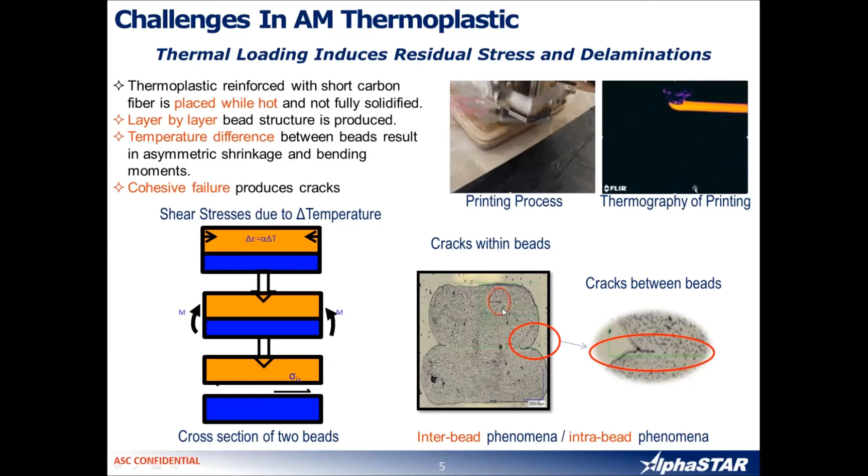Moving into slide number 5, this slide talks about the challenges in AM thermoplastics. Usually thermal loading induces residual stresses and delaminations. As you can see on the top right, this is a printing process of an AM thermoplastic, and there's a thermography of the printing shown here, the animation on the right. During this process, usually a lot of cracks within the beads are introduced. Also, there are issues inside the bead itself, between the fiber and the matrix. I'm going to look into these issues in more detail in my next slide.

Slide number 6 talks about the challenges in the multi-material AM process. The material model should consider defects in as-built printed parts. That's the key here, and that defect needs to be addressed in the material modeling itself. On the left, you see the thermoplastic, which has high porosity issues. It has polymer to filler interfacial bonding issues, residual stress issues, delamination, wrinkle issues, defects such as fiber waviness, agglomeration, and voids, and other issues.

Looking into the picture on the bottom left, you can see there's an issue between the fiber and the matrix. There's an interfacial issue. And on the right-hand side, you see between the layers, the printed layers have delamination issues, porosity issues, and all these types of anomalies that happen during the printing process. These types of issues need to be addressed within the material modeling. That's the goal of the MCQ material modeling software.

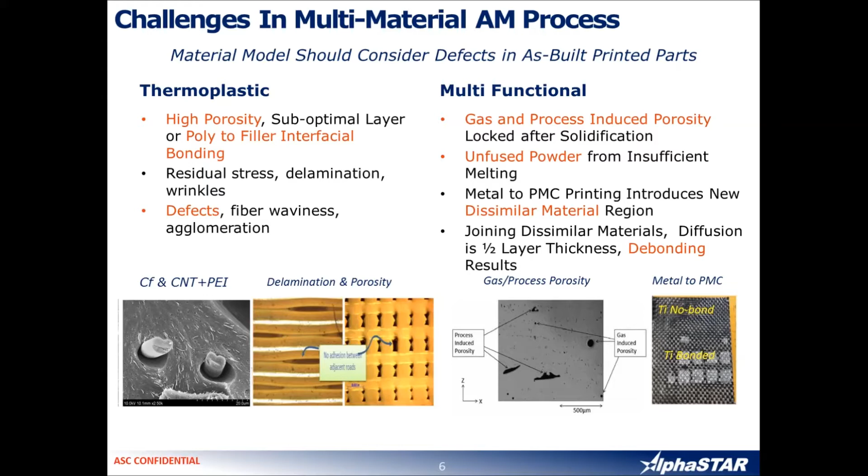On the right-hand side, you see the multifunctional material itself. We have issues with gas and process-induced porosity, unfused powder, and dissimilar material. Joining dissimilar material introduces debonding. On the bottom right, you see the gas porosity issues right here, and you see the metal to PMC issues. So these are the key challenges that happen in the multi-material AM process, and we need to address these key challenges in the material modeling itself.

Slide number 7 talks about the challenges in AM metals. So definitely the part needs to be qualified and needs to be certified. So the key challenges that we have in AM metals are gas porosity, unfused powder, we have balling issues, warping, delamination, and swelling.

These introduce intergranular cracks, surface cracks, and then you end up with a good part, or a wrinkled part, or a cracked part. These are inherent defects resulting from AM process for metals. In general, the fabrication using conventional directed energy deposition technology introduces high residual stresses, surface roughness, voids and cracks, exhibits oxidation, inconsistent density, anisotropic microstructures, and mechanical behaviors such as static and fatigue.

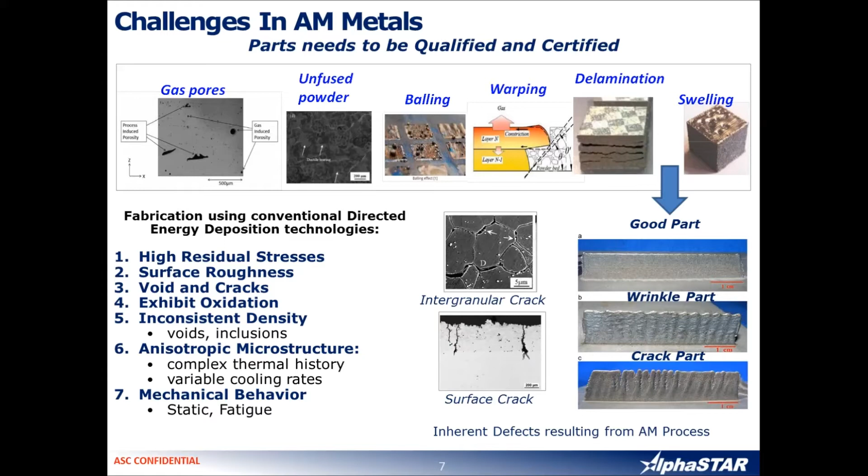So all these challenges in AM metals need to be addressed within the material modeling itself. So that's why the AlphaSTAR MCQ material modeling tool becomes very efficient before we get into the simulation mode.

Moving into slide number 8, GENOA 3DP, that's the AlphaSTAR in-house 3DP software, which follows ICME, which is Integrated Computational Material Engineering, for AM process, for multi-scale modeling of metals, thermoplastics, thermosets, and ceramics. The philosophy that we follow in this process is we start with material calibration, verification, then we validate it, and then we predict.

Since this webinar is mostly focused on material modeling, the philosophy that we're going to look into here in this flow process would be calibration of the material and then verification, validation of the material with available test. And as you can see, there is a flow process here. We start all the way from grain and grain boundary, take it to a homogenization approach, to fracture toughness, to fatigue crack, all the way up to a hierarchy, a structure, something like a heat exchanger.

So that's the philosophy we generally follow in our ICME tool for AM process under the GENOA 3DP software. Again, going from calibration, verification, validation, all the way to prediction process. And in this webinar, I'm going to focus on the calibration and verification process.

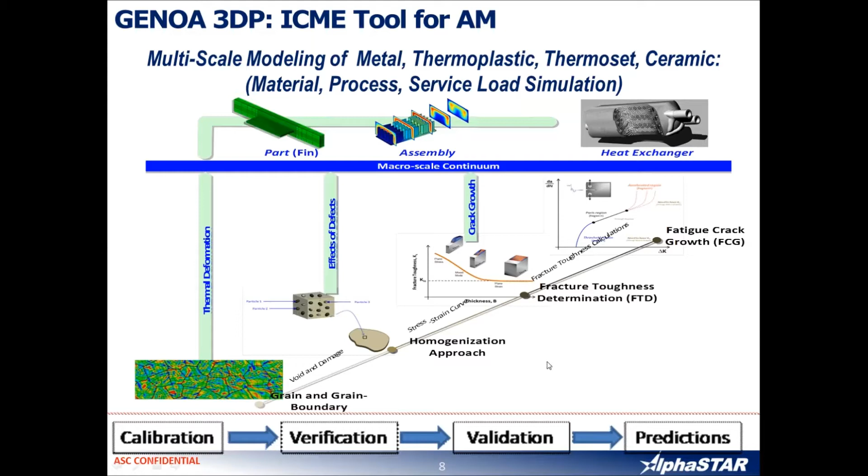Looking into slide number 9 now, this is MCQ capabilities for additive manufacturing. First, we always start with in-situ monitoring, which detects defects, voids, anomalies, and which eventually becomes input to the material modeling world. On the left, you see an example of a heated chamber Inconel. You see an animation going on here, which shows the temperature profile of each and every printed layer. That's a heated chamber part.

And on the right-hand side, once the part is built, we can calculate the residual stresses that build in there. And the picture on the right-hand side shows the scanned camera defects, delamination. So these are the defects that we can detect layer by layer using a scan camera technology. And these defects, or the anomalies, become a direct input to the material modeling analysis.

On the bottom left, you see the polymer material modeling. We have a database for 3D printed polymer material modeling for ULTEM 1010, ABS, and others. We calculate the mechanical properties, predict the neat matrix with voids, with inclusions. We also calculate temperature-dependent material properties, both modulus and strength. We have lots of test-validated cases, for example, for wrinkling effect, for delaminations, and other types.

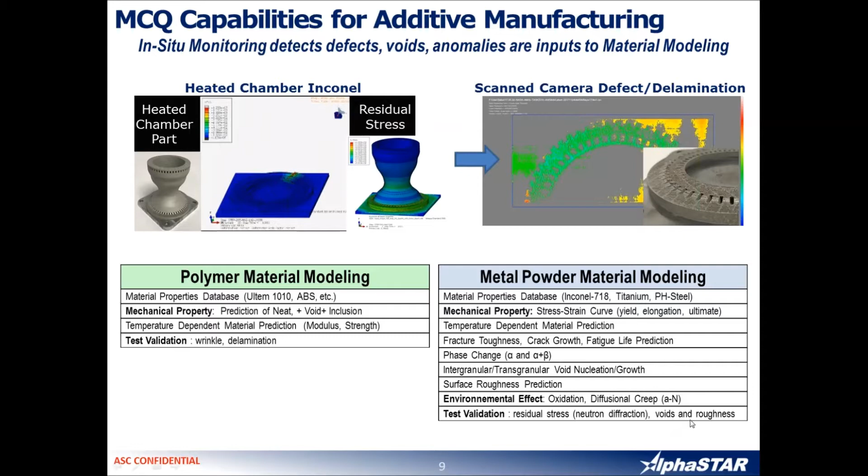So far in our agenda, we have talked about the challenges that we get in additive manufacturing process, especially in the material modeling world. Also, we looked slightly into process modeling and service load issues. And also, we talked about why AlphaSTAR MCQ software, what are the capabilities, and how we can resolve these issues using MCQ software.

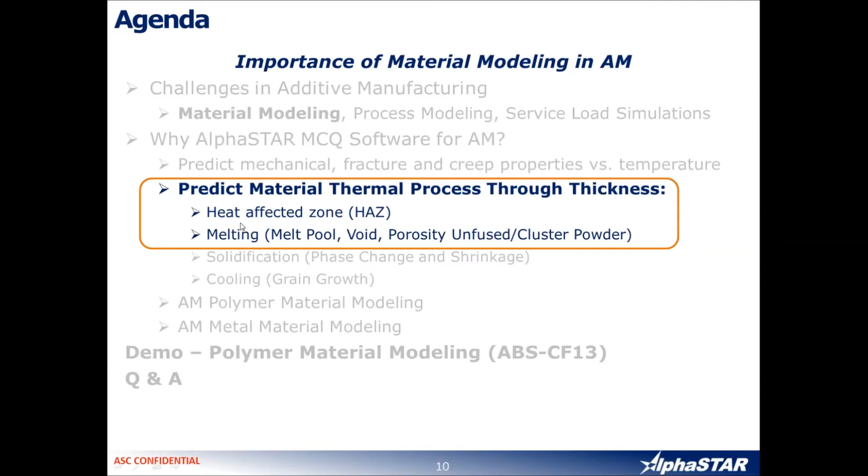Now, I'm going to look into predicting the material thermal process through thickness, especially the heat-affected zones and the melting process.

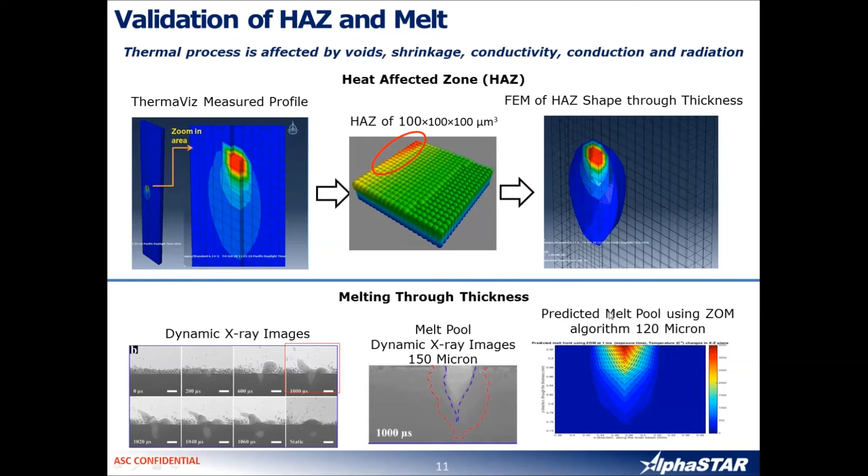And on the right-hand side, we do the prediction using the ZOM algorithm, which also shows very close to the available X-ray test, about 120 microns. And this also takes seconds to run the analysis.

In slide number 12, I'm going to focus on the MCQ nano or chopped capabilities for AM of polymers. One more time, polymer material modeling, we have a database for ULTEM 1010, ABS, and others. We can predict mechanical properties for the neat, with void, inclusion. We can predict temperature-dependent material properties, both modulus and strength, and we have lots of test-validated cases for different types of scenarios. For example, wrinkling and delamination.

So the MCQ Chopped capabilities, which are also independent of FEM, are shown in this chart. The typical input for the MCQ Chopped software is the basic fiber and matrix properties. For example, density, modulus, strength, and also if you have nonlinearity in your matrix or each layer, you can also introduce that in the input. This can be also calculated from the MCQ software and put back as an input to MCQ Chopped.

We also look into manufacturing defects such as fiber waviness, void shapes, agglomeration, and interphase. So once the input is established, the fiber and matrix properties are established, the fiber particle shape, size, and aspect ratio for different types of particles, for example, disc, ellipsoidal, sphere, or cylindrical. Once these are all established, the MCQ Chopped software can give us stiffnesses, strength, and also thermal and electrical properties.

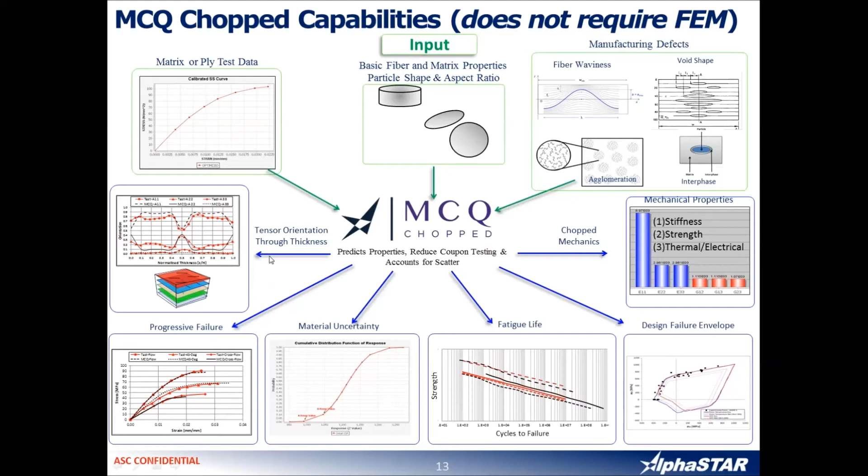Now I'm going to go over a case study using the MCQ Chopped software for an unfilled 3D printed ULTEM 1010 material. So the approach we take here is a Nano-Mechanics implementation with a cylindrical air particle for this particular case study. On the upper left, you see the matrix is ULTEM 1010, and the inclusion is an air particle which is modeled as cylindrical voids. On the bottom left, that's what you see here.

The cylindrical void has a weight ratio, volume ratio, the length, width, height, and these are modeled as cylindrical voids with 22% of air particle considered here. There's also a ply stress-strain curve, which is also part of the input of this software. The output that we get out of this MCQ Chopped software is a modulus in each and every direction,

as well as the strength. And these were also test validated for multiple cases, for the tensile modulus, for tensile strength, and compressive strength. And as you can see here, the percent difference is very low, about 3 to 4% in the XZ direction, and the ZX direction is less than almost 10%. So that shows that the material calibration that we have done in our input for the MCQ Chopped is valuable and can be test validated.

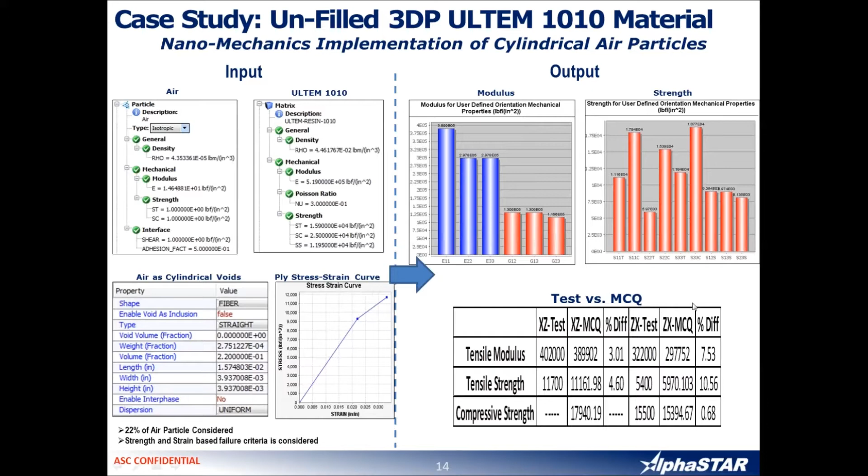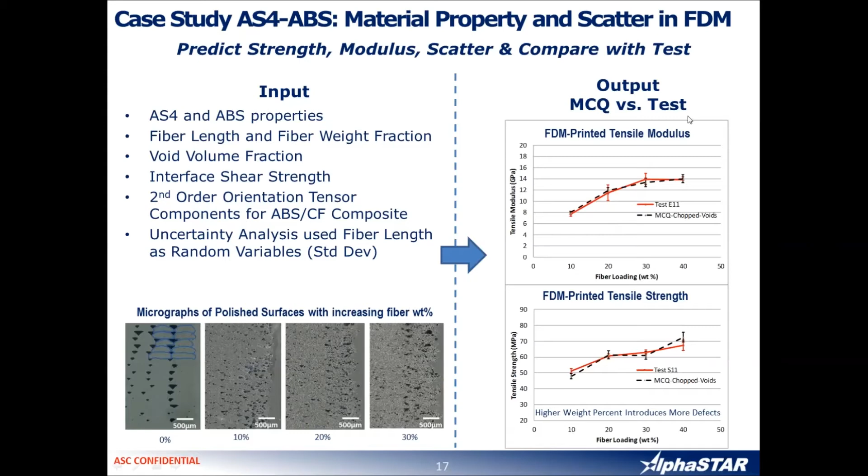Next, in slide number 18, I'm going to talk about MCQ capabilities for additive manufacturing of metal powders. For metal powder material modeling, the database we have is for Inconel 718, titanium, and PH steel. We calculate material properties, stress strain curve, yield, elongation, and ultimates. We also calculate temperature-dependent material properties, fracture toughness, crack growth, and fatigue life prediction. We look into the phase changes. We also calculate intergranular and transgranular void nucleation and growth, surface roughness predictions, and we also consider environmental effects such as oxidation and diffusional creep. Also, we have test-validated cases for residual stress, voids, and roughness.

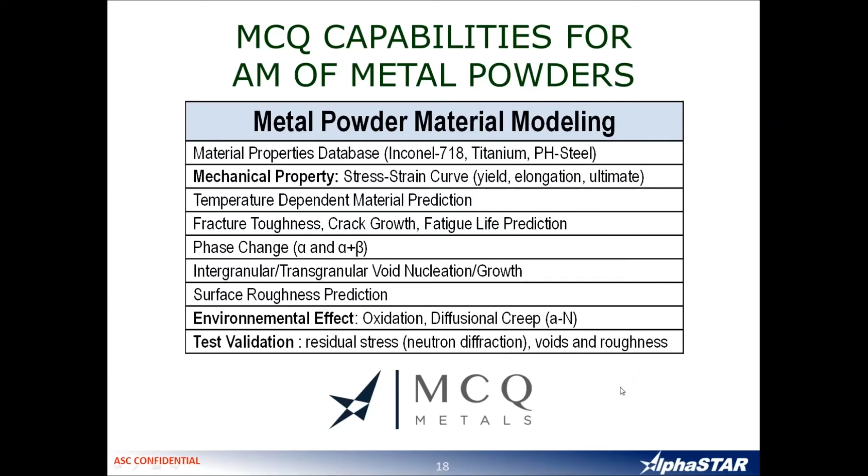In this slide, I'm showing the predicted defects observed in the AM process. For the local model, we look into the crack initiation and crack growth predictions. On the upper left, you see the deviating cracks, the transgranular crack, and the intergranular crack. This is what we can predict using our AM process software.

On the bottom, you see the void initiation and propagation. We can predict the surface roughness, and here's an example of the surface roughness predicted and compared with the bottom right test.

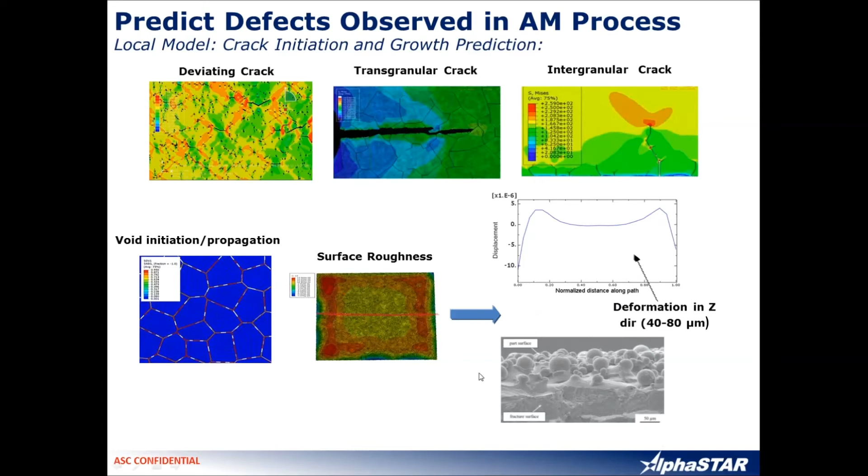On the next slide, which is slide 20, we also look into void formation and oxidation. We perform thermostructural plus damage computation analysis to predict the void content and oxidation. On the left, you see the global model, and we take the global model and we break it down to a bunch of local models.

As you can see, the CPU time for the analysis for the global can take 36 hours, whereas the local, if you have a bunch of computers available, you can run them for only 1 hour and you can get the quick solution right away. And what it provides you is a void for each and every element, and also the oxidation for each and every element. So this becomes very valuable information in our material modeling analysis.

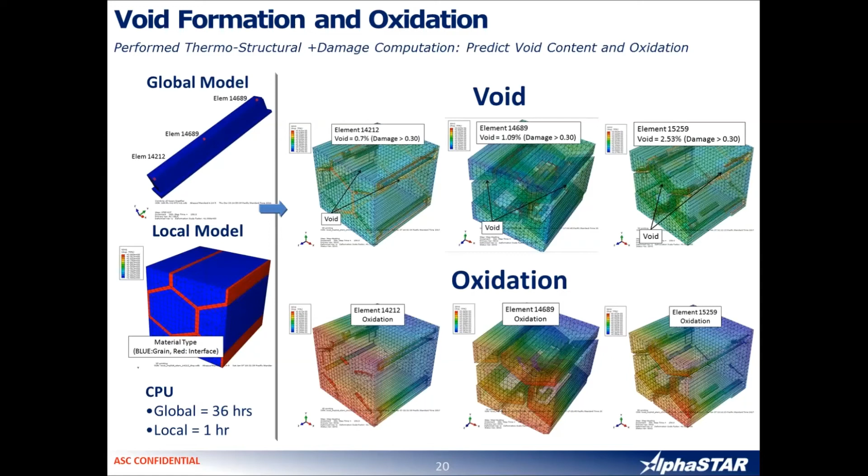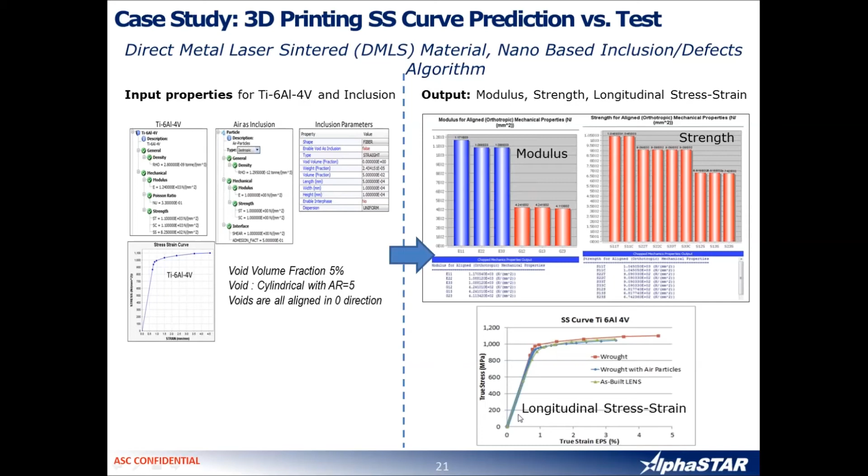test. For the wrought case, which is the red curve right here, for the wrought with air particles, and the given as-built LENS stress strain curve. And it shows a pretty good comparison between the wrought with air particles and the as-built LENS. That shows that there were anomalies, which were inclusions as air particles introduced inside the titanium aluminum, to give us the correct stress strain curve, which can be easily compared with test.

In the next slide, we continue with that same material, and we're going to perform 3D printing for fatigue prediction versus test. This is a validation of titanium aluminum again for DMLS at room temperature. We start with a full stress strain curve. We look into the material properties and the geometry of the material. We calculate

the toughness versus thickness, and then we run the FCG to calculate the da/dN curve as shown in the picture right here. So all this process is done using MCQ Metal software.

Once this curve is available, we can take this information inside an actual FEM coupon simulation here, and we can predict the SN curve as shown in the bottom right for the R equal to 0.1 case. The triangles are predicted using GENOA, which is a simulation, and the circles are from test, and it shows a pretty good comparison right here. So the correlation between the AM material output and models is clearly shown here.

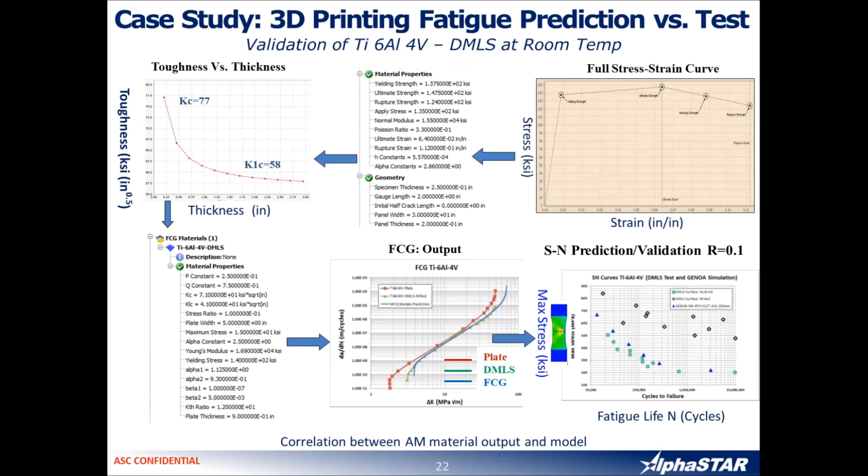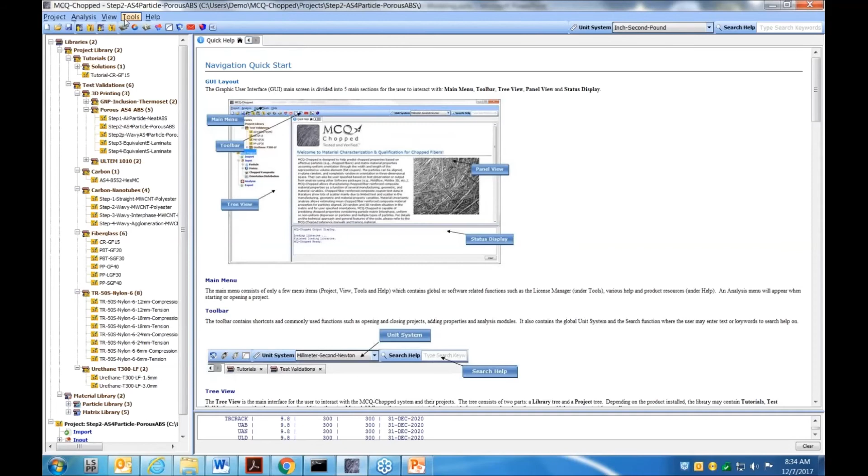Now I'm going to give you a demo of the MCQ Chopped software. When you launch the MCQ Chopped software, there is a welcome page right here which talks about the material characterization, qualification, chopped fiber. There's a quick start navigation option here. It goes through the navigation of all the key tools available in MCQ Chopped. You can go back and then you can click on the step-by-step tutorials that are available.

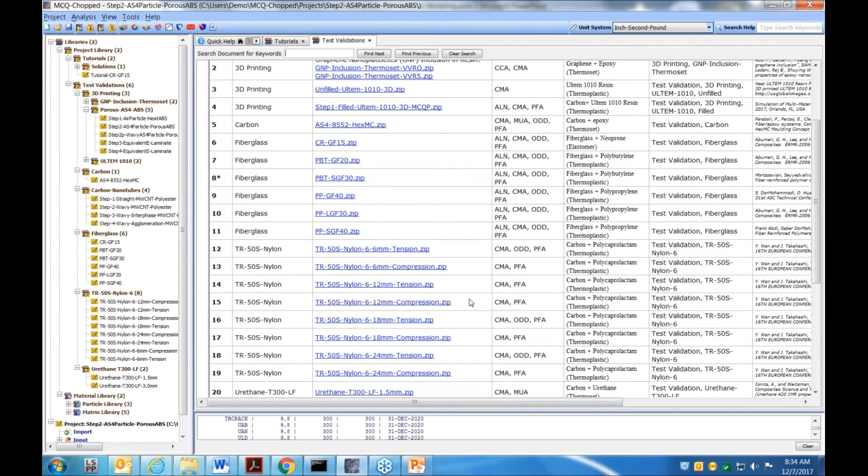For example, in this software, we have two detailed step-by-step tutorials available, and one of them is for the 3D printed material, which is AS4-ABS. And then you can go back to the home screen, and also you can click on the test validations. We have a bunch of test validation cases available. Altogether, we have 22 of them which have been validated, and these are the case studies for MCQ Chopped software.

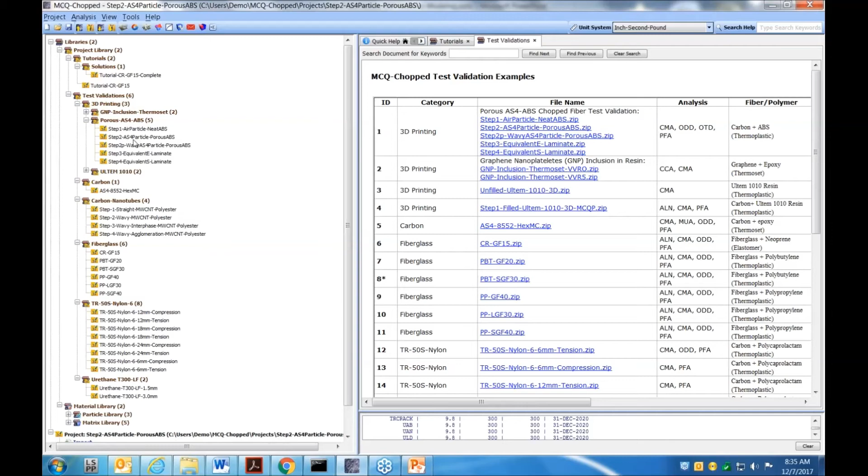Okay, also you can see in the tree on the left-hand side, there's a tutorial, all this solution which was showing on the right side anyway, and also you have all these different test validated cases right here. I'm going to bring up one of those examples. For example, I'm going to look into 3D printing material, which is AS4-ABS. Open this project.

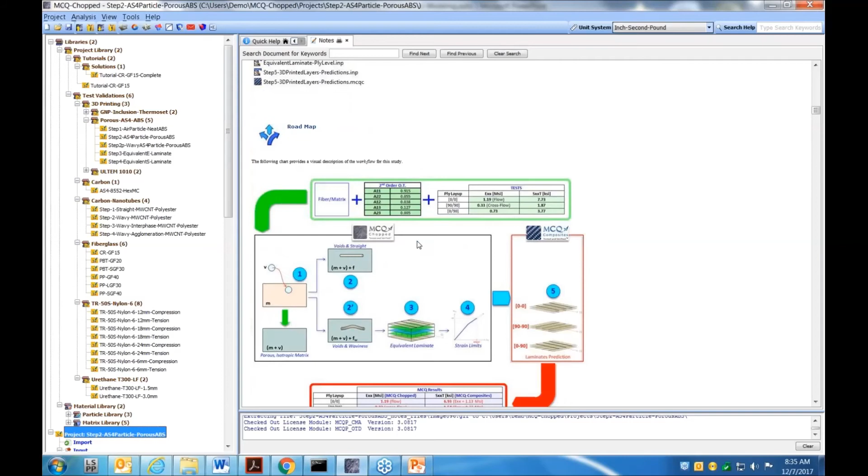And all of these case studies and tutorials come with detailed documentation. For example, for this particular case, we have a step-by-step. It goes through each step. What are the inputs? What are the assumptions? What are the outputs? And if test data is available, compare with test. It goes through the entire step-by-step process of this particular tutorial.

And the typical input for this one is the AS4 material, as you can see on the left side here, and also the porous ABS material. If I click on the chopped composite, this shows the input required for the particle itself: the weight fraction, volume ratio, length, and diameter of the particle. In this case, we're assuming the particle to be fiber, which is a cylinder.

And you can also make it either straight or wavy, and there are lots of other parameters available. For example, you have the option to put more voids in your material. You can enable interface. You can have a uniform dispersion, or you can have a non-uniform dispersion.

And if I look into the analysis tool, we have a bunch of analyses available. One of the key analyses is chopped mechanics. I'm going to run this analysis. And while this is running, I'm going to talk about other analysis tools available here. One of them is orientation tensor determination, chop characterization, material nonlinearity calculation, aligned nonlinearity, progressive failure analysis, design failure envelopes, and material uncertainties.

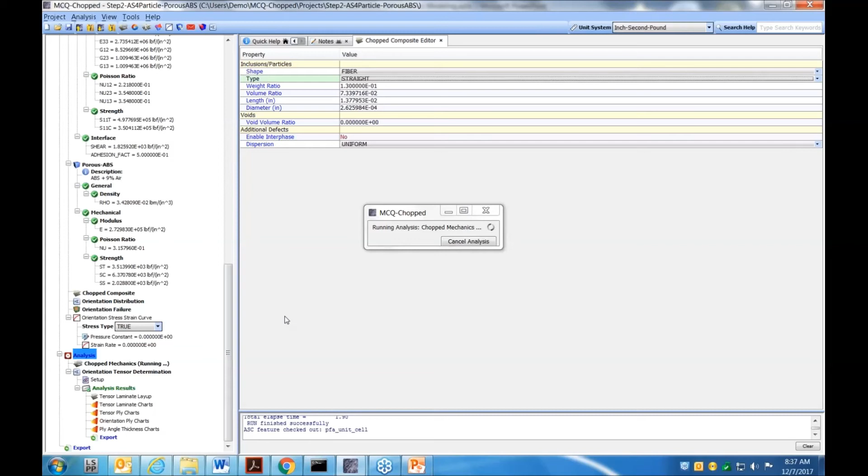So while this is running, it takes a few seconds to run the chopped mechanics analysis, and pretty soon I'm going to show you what the outputs are. So you can always go back to the notes and go through the tutorial in detail. You can always print this out, go through it, and practice this.

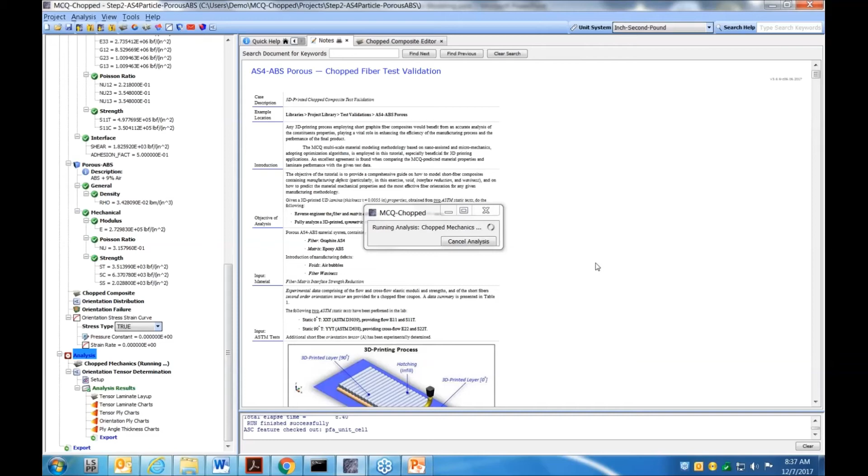It's a very user-friendly tool, and you can quickly learn this software, I would say in hours. You can go through this tutorial step by step, and in no time you can become a professional in this software. Okay, so once this analysis is complete, you can see the output here.

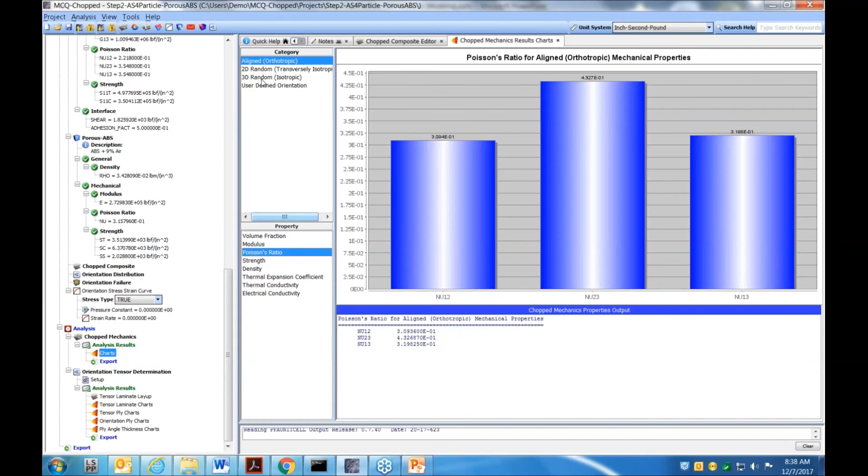The modulus, Poisson's ratio, and strength are the key mechanical properties calculated using this chopped mechanics analysis for aligned, when all the fibers align in one direction, for 2D random, 3D random, and user defined. So if you have a layer through the thickness and you have orientation of fiber, you can also look into all those, and you can see here the modulus changes when you look into the different alignment of the particle. Also strength, Poisson's ratio, same thing for different categories, and also for the modulus.

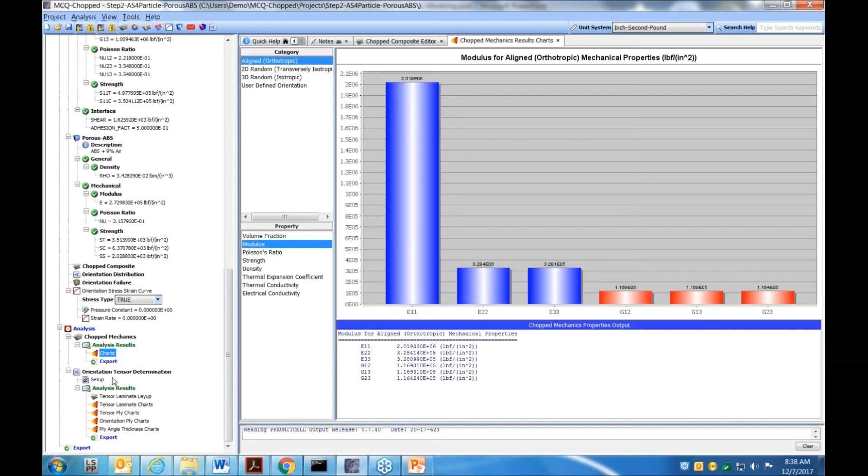There's another key analysis tool here, which is called orientation tensor determination. And the setup for that looks like this. So you define the thickness, and you can input the orientation tensor components through the thickness of the given material, either from the test or from other software such as Moldex3D or Moldflow.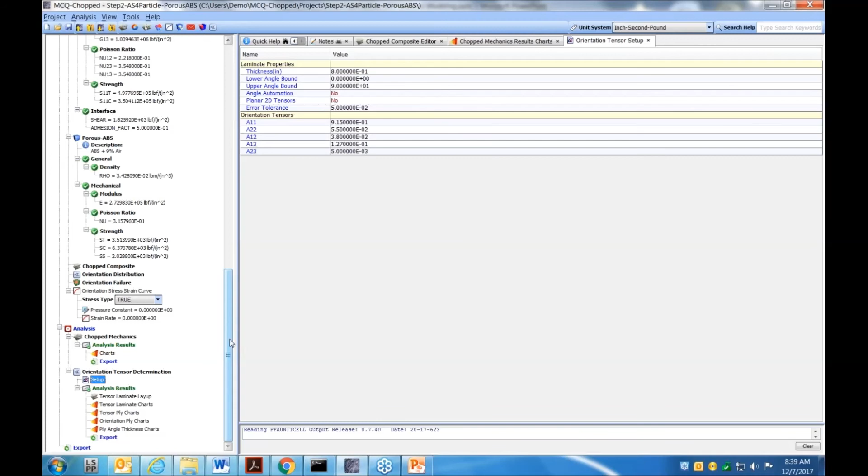And once you run this analysis, it gives you what type of orientation of the fiber you have through the thickness. For example, here when I run this analysis, it tells you the orientation of the fiber through the thickness. It's 0, plus-minus 45 orientation of the fiber through the thickness. I can export this orientation back to my input.

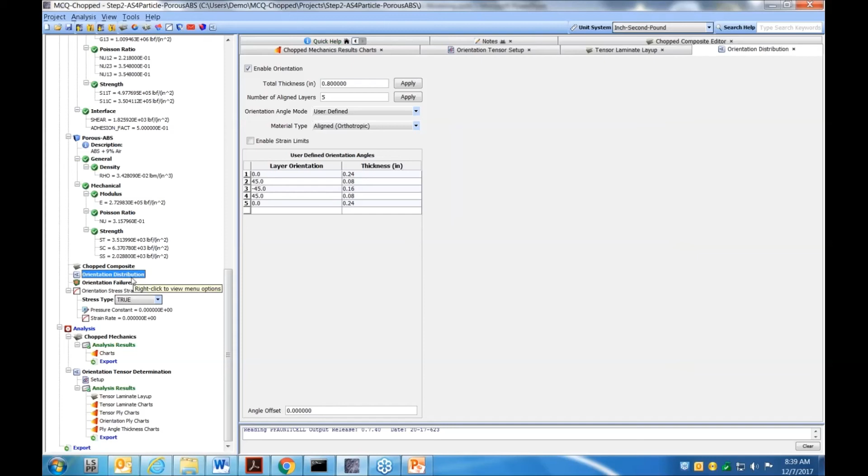And when I click on this orientation distribution here, you can clearly see the thickness, how many layers there are, and these are the orientations through the thickness and the thickness of each and every layer. And I can rerun the chopped mechanics, and it will provide me the information not only for aligned, 2D or 3D, but also the properties for the entire test specimen with those oriented fibers.

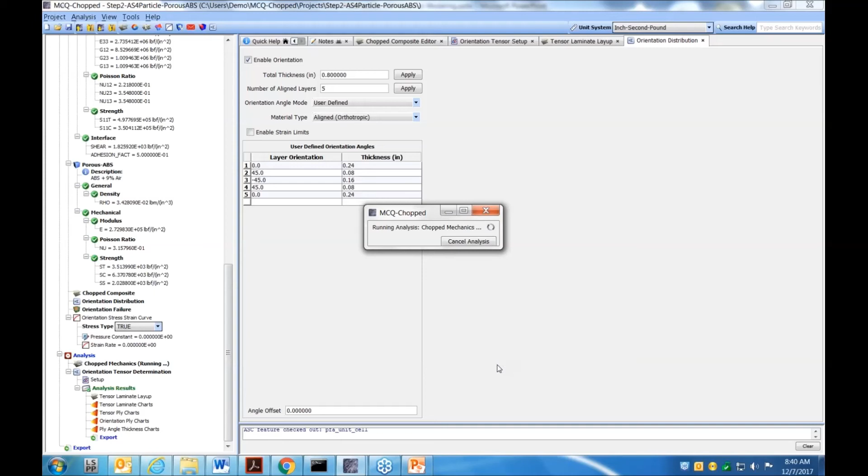Okay, so that's the basics of this software. I'm going to switch back to the presentation while this is running.

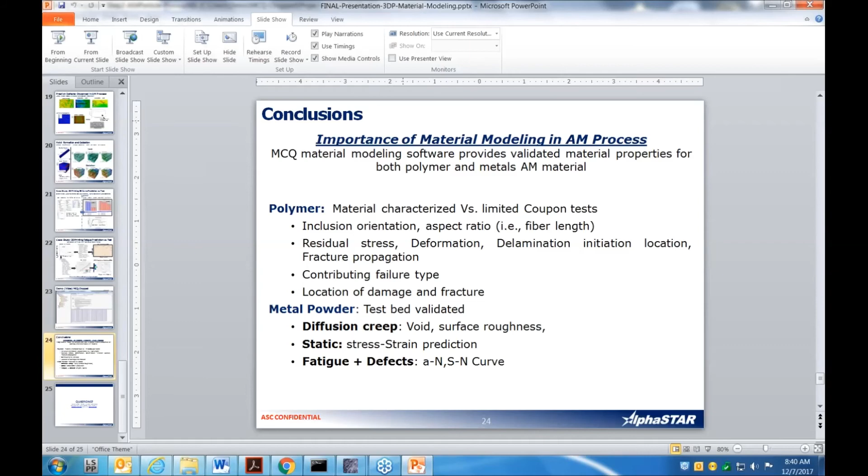And in conclusion, I'm going to talk about the importance. We started with the importance of material modeling in the AM process. And what we proved here, the MCQ material modeling software provides validated material properties for both polymer and metal AM materials. For the polymers, if we look into more detail, we characterize the material with limited coupon tests, with inclusion, orientation, with different aspect ratios of the fiber, for example, length and diameter.

We can calculate the residual stresses, deformation, delamination initiation at different locations, and also fracture propagation. And also we looked into the contribution of failure types through the thickness and the location of damage and fracture. For metal powder, we looked into the diffusional creep, for example, void and surface roughness predictions. We also calculated the stress-strain curves, and we looked into fatigue plus defects, and we showed you the AN and SN curves.

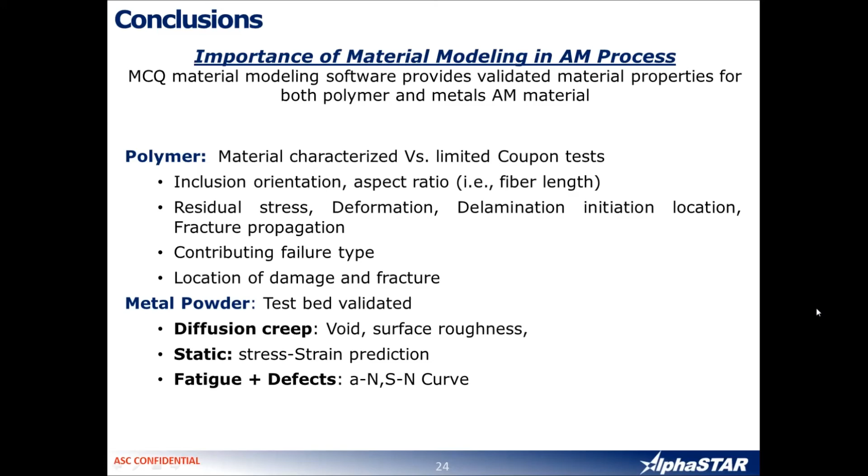The first question that came through: is the software capable of calculating temperature-dependent properties? Yes, definitely. In one of the slides, we did show we have a multi-factor technique to calculate the material property with respect to temperature. As you can see here, we showed an example for a 3D printed ULTEM 1010 material.

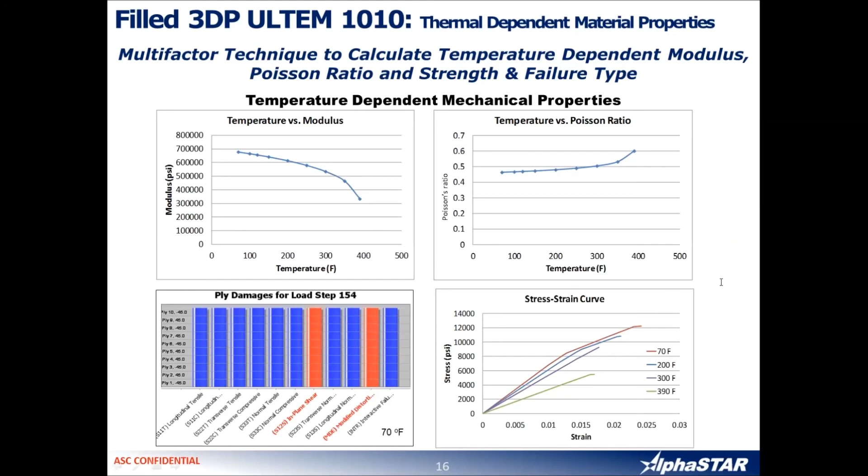For metal AM, how does your software interact with the laser source, if at all? Examples: the ability to control laser spot, beam shaping, or scanning. Let's see, I can do this. Okay, my name is Cody Godinez. I'm going to jump in on this question from AlphaSTAR.

So currently, we're working on hooking up the feedback control to the laser source. That's one of the works in progress. It's a future thing for us, but it's on our spotlight. So we can take in the information in real time and then give solutions, but we need to finish that final link of the feedback to the laser source. So currently, as the laser is being moved, we can inspect the surface defects and surface roughness, and do thermal and structural predictions, but again, that last link needs to be complete.